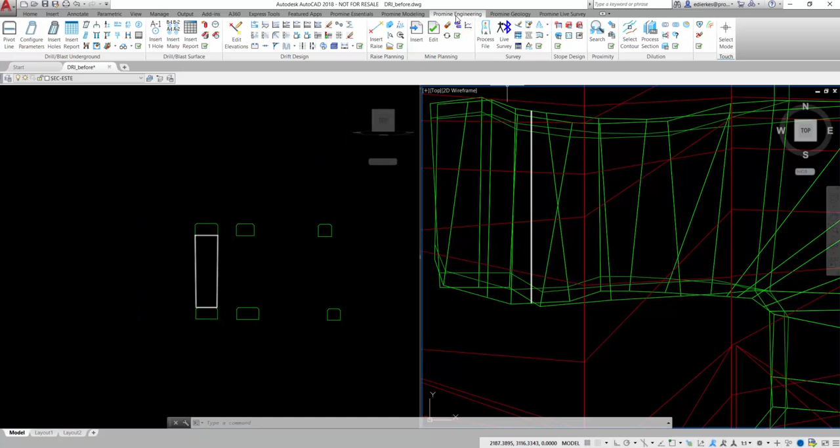This module can be found in the engineering category of ProMine, and the main functionalities will be presented in this quick overview. We are going to start with this drawing that shows the section of a stope to quickly insert the drill and blast design.

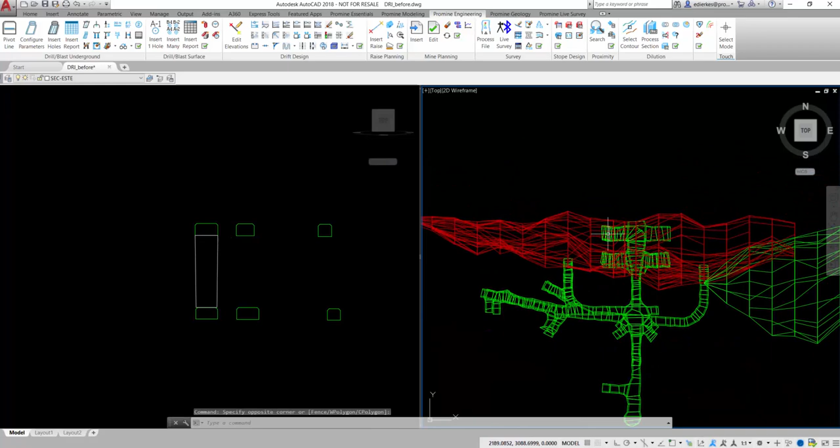On the left side we can see the section with the two access levels in green and the blast outline in white. On the right side we can see the plan view of the same area with the ore in red.

The first step for the insertion of the drill holes is to insert the pivot line. After selecting the command pivot line, a window will open that shows three different insertion methods. The first two options insert a straight pivot line and the third one an arched line.

In the first option you can see that the program allows you to configure and personalize the used drills. Here we use the easier second option, where just the distance to the walls and floor have to be defined. By clicking OK and then selecting the drift contour, the pivot line is quickly inserted.

Now all the required information is in the drawing: the pivot line, the drift outline and the blast outline. To indicate this information to the program, we use configure parameters and select the corresponding outlines as requested in the command line. After the successful setup, we can now insert the drill holes.

The command first asks on which side of the pivot to start and then shows different options for the insertion. In this case, we are going to use the distribute option, which allows us to insert holes with an even spacing along the pivot line.

So we select distribute, select the pivot option, and then the outlay of the first and last hole. Based on this information, the program inserts the holes at an equal distance. Automatically it creates 4 holes and shows the spacing of the holes in the command line.

We can increase the number of holes to 5 by simply writing this number in the command line and then pressing enter. The hole number gets automatically updated, as well as the information about the spacing. As this seems like a good spacing, we can select go and then exit to finish the command.

Once the drill holes are inserted, we can insert a drilling report. Using the command insert report, the program shows us the different configured reports that are available. In this case we have 2 types, drilling and blasting.

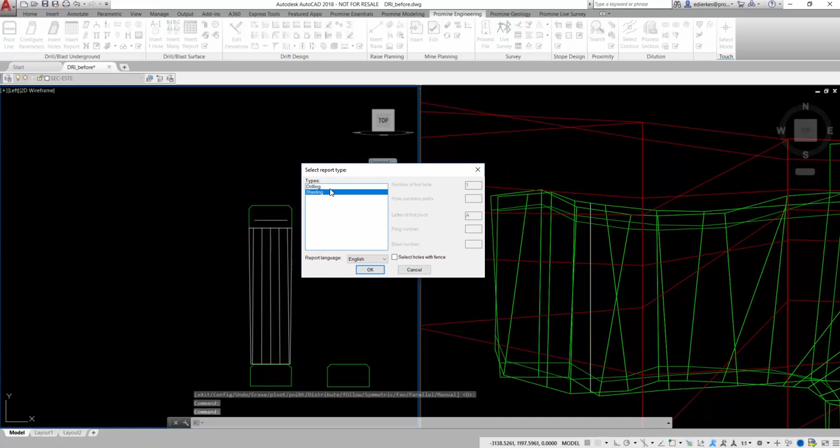These reports are just examples of possible reports. As many as desired can be set up, as well as all the fields that are visible in the different reports. We select the drilling report, select OK, and select all drill holes and the reference line, and immediately the report will be inserted.

Once the drill holes are inserted, we can quickly set up the blasting. We're going to start with the load drill holes command, where we can configure the type of explosive, the stemming and the bottom load. If desired, a staged explosive can be inserted.

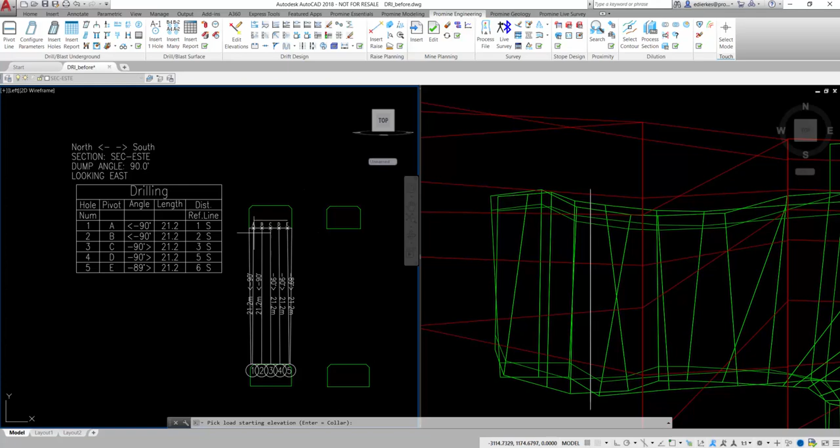We choose the drilling diameter and then press OK. Now we have to select where on top of the drill hole the explosive should extend to, and select the holes that we have to charge. Obviously, just like the reports, the types of explosives, its characteristics, the prices as well as the drilling diameters are completely customizable.

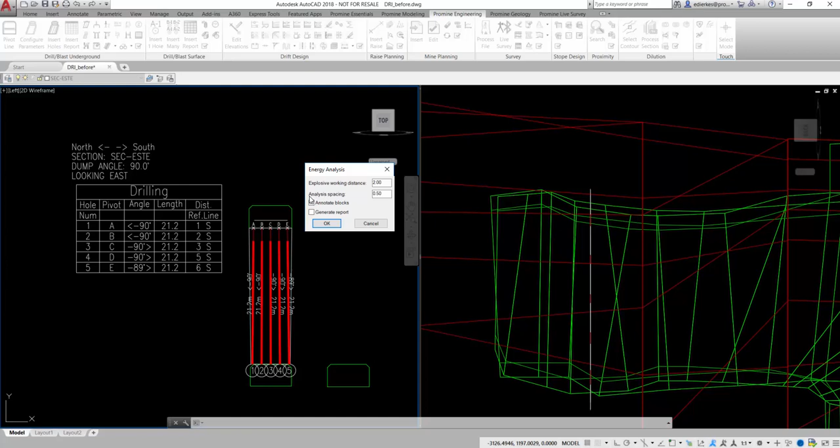With the drill holes charged, we can now quickly insert an energy analysis to verify that the drill design and the explosives amount are accurate for the breakage of the rock.

We're going to use the command energy analysis, establish the maximum working distance for the explosive, the analysis spacing that we want, annotate the blocks, and no report. Now we select the analysis area and the drill holes that need to be analyzed, and we're ready.

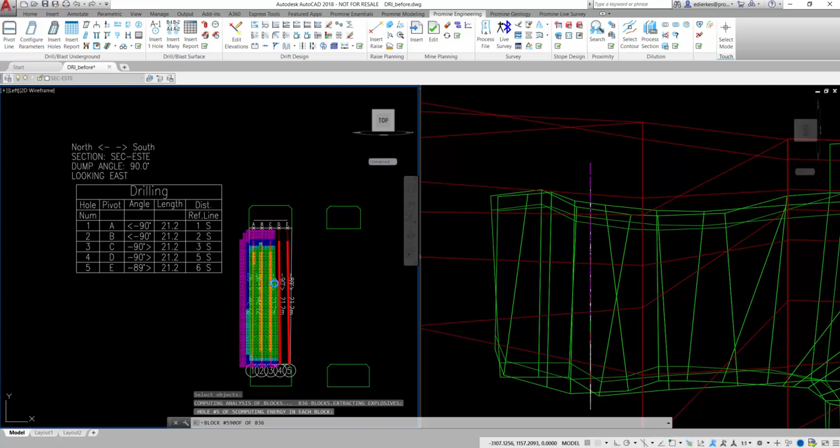The program inserts the colored blocks and the block number and value. The red and yellow colors indicate that a lot of explosives is concentrated in this area, while the green color is the desired value for an even blast. Blue indicates that there is a low amount of explosive that could reach this area.

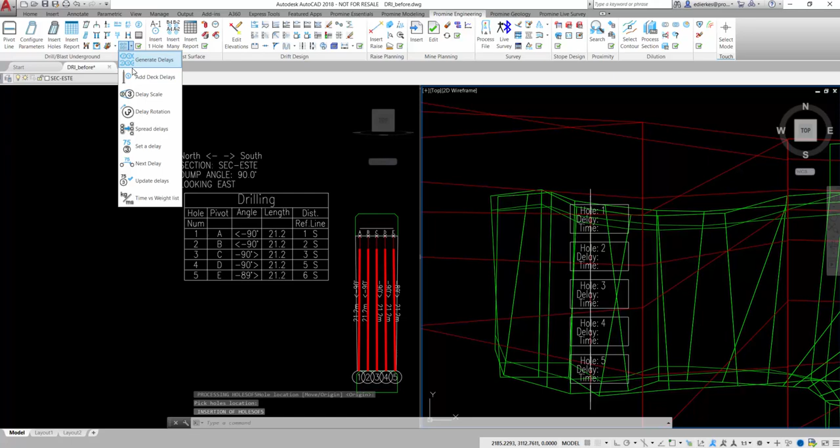It is possible to insert delays. We're going to use the command generate delays, select the holes, the type of delay, the origin and the size of the block. Once the delays are generated, we can configure them.

Starting with the first one, using set delays, choosing the first delay and setting it to 0. The block in the drawing is automatically updated. Based on this first one, we can establish the delays of the other drill holes.

By using the next delay command, we choose the first hole that we just set and then mark the following ones in relation to this one. Here we are choosing a delay of 25 milliseconds for one hole to the next. The delays and the times are also completely customizable.

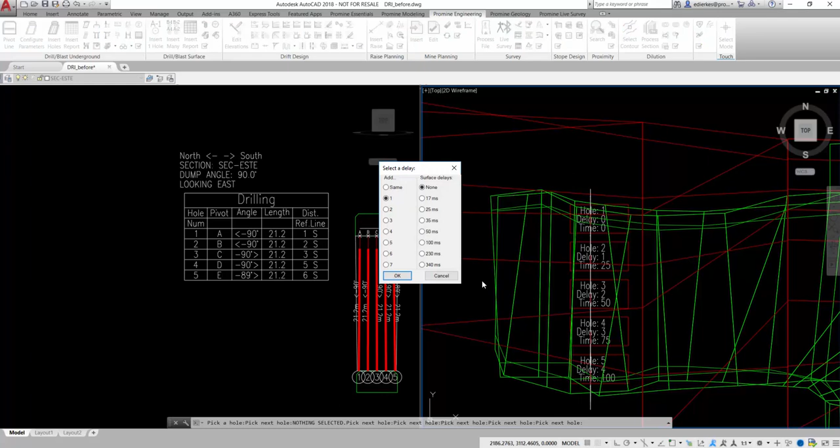To finish, we are going to insert a few more reports, starting by using insert report again and selecting the blasting report this time. Select the drill holes and the program directly creates the report.

The last report to insert is a stope summary. We are selecting the command, select the drill holes, and insert the costs for drilling and blasting. A small report will be inserted.

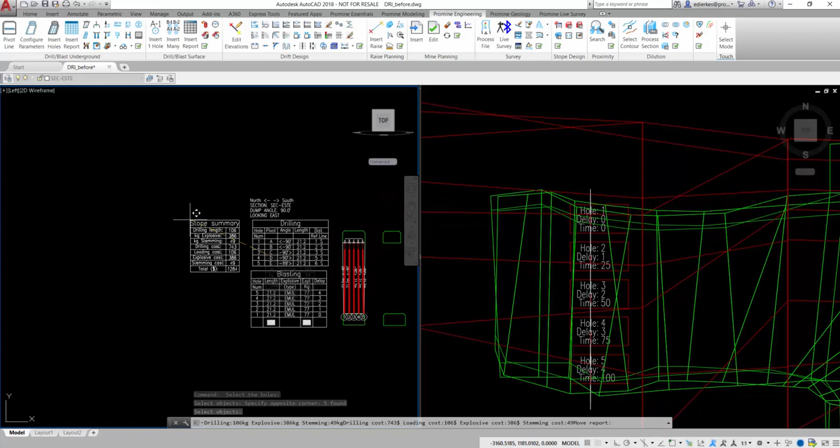This concludes this quick overview of the Drill/Blast Underground module.